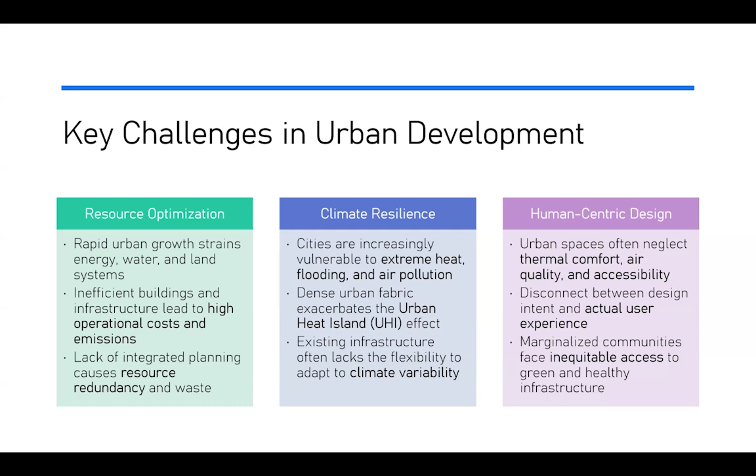So how can we use SusTech in addressing our urban development? These are a few key pointers highlighting what can be done for our sustainable smart cities using sustainable technologies. Smart cities integrate digital technology with sustainability goals to enhance the quality of urban life. The first role of SusTech in smart cities is data-driven urban design. Using simulations, sensors or digital twins, it makes evidence-based decisions across the planning and life cycle of the building.

Resource efficiency is the major point: development towards low carbon or resource optimization of systems can be helped by simulations or sustainable technologies. Climate adaptive infrastructure: as we just discussed, our existing buildings are not adaptive, so using SusTech we promote resilient design by simulating or responding to climate risks. Enhanced livability, that is, human-centric environments. Humans should be able to live comfortably indoors and outdoors, with good air quality, mobility and accessibility.

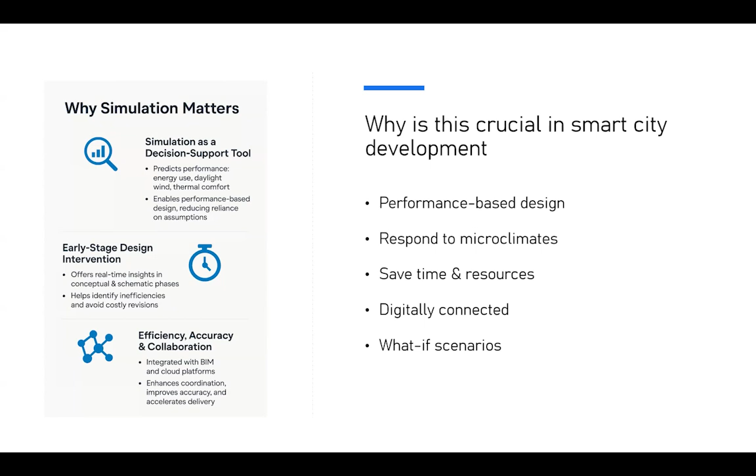Digitally connected: there is a lot of seamless integration technology available today, such as BIM, GIS or urban data sets, and all these can be integrated in our design development. And what-if scenarios is a key term we can use with simulations. We can predict, we can design, we can test the worst case and the best case, and compare the results of every design, however challenging or complicated. What if was always a question; now we have answers to it. Ultimately, simulation isn't just a luxury, but a necessity for building future-ready sustainable cities.

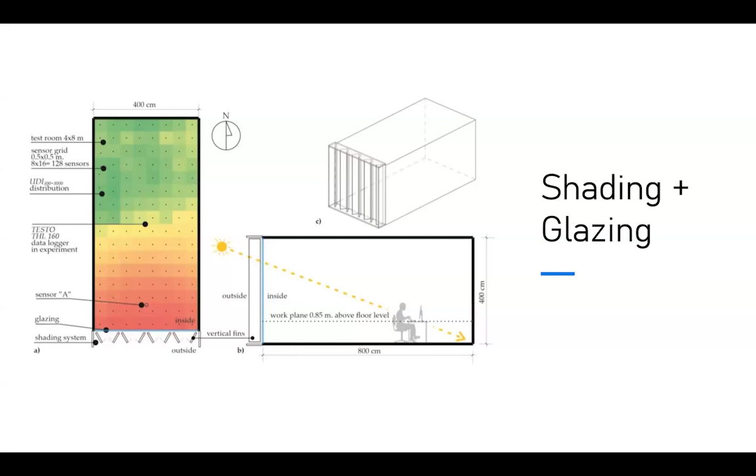Here are a few examples. Before talking more about the tools, I want you to look at what tools can do, then we can discuss the tools themselves. I'll start with the building context and then move to the urban context. So, shading plus glazing. This is an example of a room where daylight is entering the building, and the simulation tells us with a grid of sensors which areas are visually comfortable and which are not.

When designing for high performance buildings, shading and glazing are two critical elements that can determine our visual comfort and also the energy efficiency. So the rule of thumb of designing windows is no longer valid. With tools such as simulation software, we can predict what the right window sizing should be.

Using especially the solar diagram, the chart enables us to define what time the solar energy or the daylight is entering and what is the cutoff time we'll have to shade. So using the solar charts, we decide on the horizontal and the vertical or any form of shading devices. And there are a few standard terms that we compare our results with.

Here we have ASE, which is annual sunlight exposure, UDI, that is useful daylight illuminance, and DA is daylight autonomy. Basically, ASE tells us if there is too much direct sunlight in a space, which can cause glare or overheating. Whereas UDI helps us identify zones that receive optimal daylight without artificial lighting.

And the zones that are in gray tell us how much shading is required and how much openings are required. Therefore, it gives us the balance of both. And daylight autonomy shows how much of the year a space can function with natural light. So it is a simulation of 365 days.

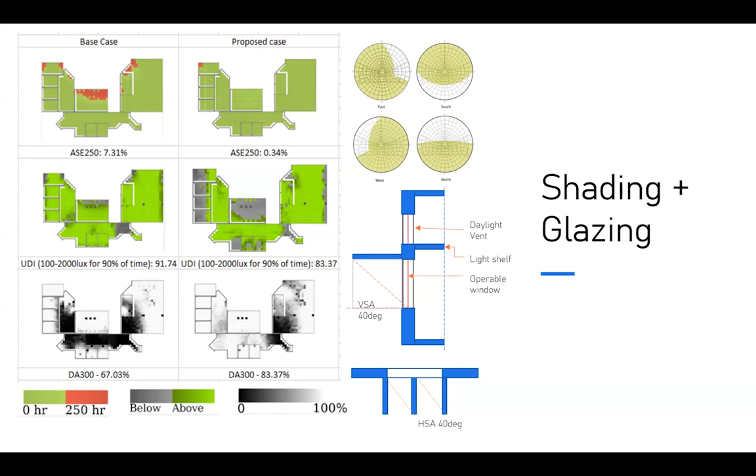So each simulation tells us differently when we are comfortable or when we are receiving enough light to do a particular task, and what percentage of the hours or what percentage of the days we are receiving daylight. So this is the daylight simulations. And moving on to the energy simulations,

it works a little differently. So there is some data gathering that is required even for the daylight. But when we move to the energy simulations, it becomes more complex because it's not just about the building geometry. We look at the lighting power density, equipment power density, that is the energy consumption by various sources,

and the fresh air integration, what type of HVAC system we have, what is its flow rate, what is the efficiency of the HVAC system, and the ideal temperature and humidity that we would want to achieve in our zones. And also sometimes it is very much required, especially for existing buildings, to interview and understand how the user is actually occupying the building.

So the simulation where we enter 9 to 5 for an office building is not always 9 to 5. We know people start early. We know people sometimes leave the office late, or there might be some activity which is out of the schedule. So therefore, it is important to understand these what-if scenarios and what percentage of the year this is happening.

And then we have our output saying what are the calculations, what is the consumption, what is the HVAC system that is best suited for that particular design, and schedules that are mismatched. So what happens due to that usage, what will be the energy difference? Therefore, this is for the new buildings, and for the existing buildings, there's another step of calibration.

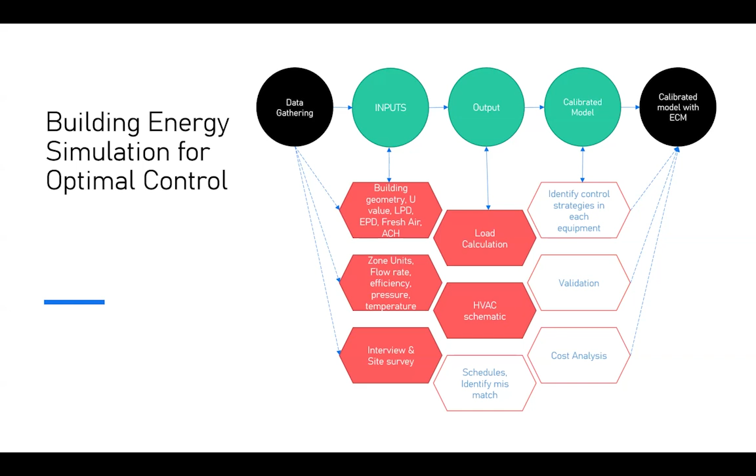This is one example of the actual existing system, chiller plant or HVAC system, that was in an office building, which is a newly built building of around 2 to 3 years. And we tried to simulate the same HVAC system in our software. So of course, the building geometry plays a role, but here the HVAC being the high energy consumption equipment, we had to match the exact details of the site with our software.

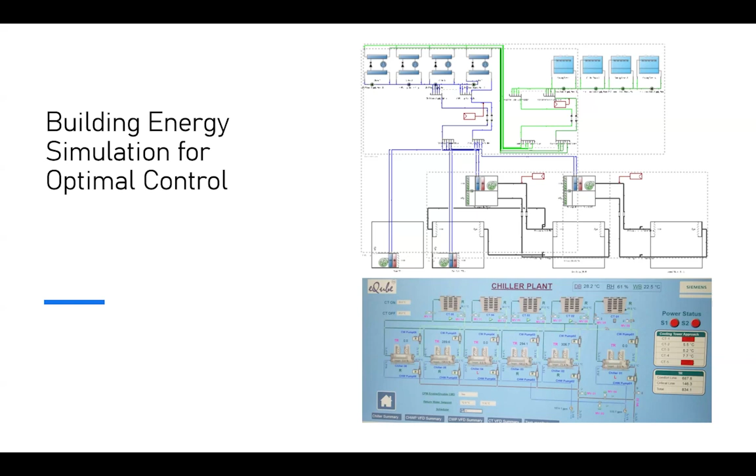So the number of chiller plants, their efficiency, their inlet temperatures, outlet temperatures, everything matters. And how many chillers are running at a time, and how many chillers are running during the peak consumption. Everything should be as per site. Once we get our model right, which has further steps to understand how to get our model right.

So this is one of our understandings of simulation, where the model usually gives us an auto-sized system, whereas in the actual scenario we set the limits for everything to match the site and our model. We go with iterations of inputting data. So when you input all the data at once, the software crashes and your data might not match the existing data.

Therefore, we went with iterations, such as first identifying the type of system, second entering their data with actual numbers, equipment by equipment. That is first the cooling towers, then chillers, and then the temperatures and the pumps and the variables and the set limits, etc., and so on.

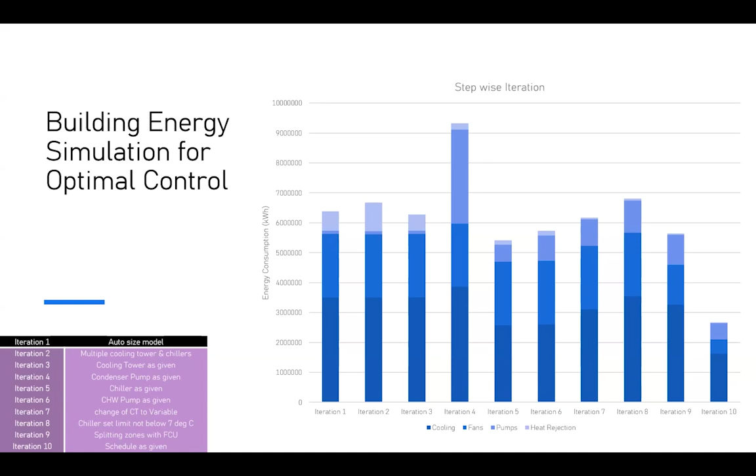So when we see a hike in energy consumption, we know something is wrong because we know what is the existing energy consumption. So we correct our simulation models to the existing, and the iterations are captured in terms of errors. The goal was to reduce the gap between the simulated energy use and actual utility.

Therefore, both monthly and annually, the data was checked, and the statistical indicators, that is the standard evaluation method for calibration, are CVRMSE and NMBE, that is the coefficient of variation of root mean square error, and the other one is normalized mean bias error. As per ASHRAE Guideline 14, it is acceptable to have CVRMSE below 15% and NMBE within plus or minus 5%.

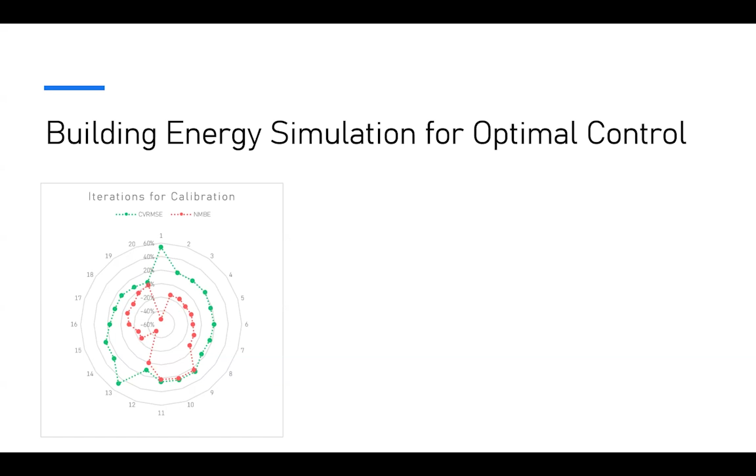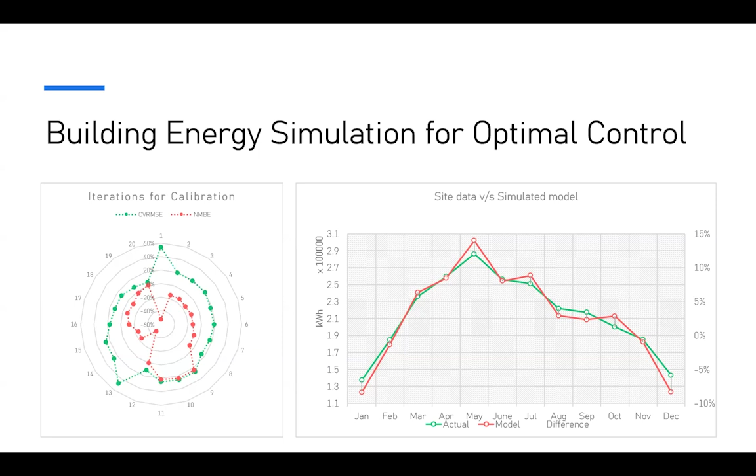So this is the data that we could achieve: the monthly energy consumption, the actual versus model. And now that we have our model ready with the limit that has been set for the error margin by ASHRAE, now we can tweak the energy conservation measures that can be implemented on site for the existing building. So all this is possible only with the help of simulation software. So this is with the building where we have seen the daylight and the energy.

And similarly for the urban context, we have different metrics. So it's not just about temperature and humidity. There are other variations which are not controlled by our HVAC system, that is our wind patterns or the radiation outdoors, where we are directly exposed to the sun. Therefore, UTCI is one of the key metrics, which is the Universal Thermal Climate Index, which gives us a broad temperature difference. And UTCI tells us how it feels to people in outdoor spaces. It considers all the parameters that have been listed, and it makes a comprehensive thermal comfort index.

And it is a scale of -50 to +50. -50 refers to extreme cold stress, whereas +50 refers to extreme heat stress. The ideal temperatures are between 10 to 25. And this is usually used in the urban context because of the urban heat island effect, which is also referred to as UHI.

What is this urban heat island effect? Urban areas tend to be warmer than surrounding rural regions, especially at night. This is due to the heat-retaining nature of built surfaces like our concrete walls and so on. They lack vegetation, which results in higher energy demand, increased discomfort and heat stress, and poorer air quality. Therefore, it is important for us to understand the patterns in the urban context in terms of all these external parameters, and the scale that we have is UTCI.

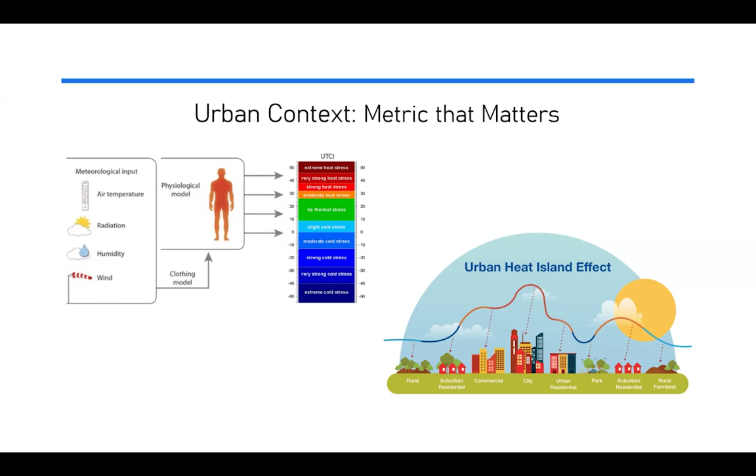And here are a few examples of UTCI simulation. UTCI tells us the temperature, and it varies over the times in a day. So we have simulations here showing morning, midday, afternoon, and night. So why are we looking at temperatures at different times in a day?

For example, suppose morning, which is 7 to 11 hours. This is where people begin commuting or engaging in light activities. So pathways need some solar exposure in cold climates, and partial shading might be required in warm climates. The morning temperature should ideally be 15 to 23 degrees Celsius. I'm not referring to air temperature, but the UTCI temperature, which is considered to be good. And if it's not in this range, then we have design interventions.

Similarly, for midday, that is 11 to 13 hours, UTCI can rise very drastically. It can go as high as 38 degrees Celsius, especially in dense and unshaded areas. This period poses peak heat stress, especially in tropical and arid climates. Therefore, the design interventions for this time can be dense shading using trees, canopies, or reflective materials, that is light-colored pavements or roofs, and then vegetation. This will minimize the heat traps within the urban context.

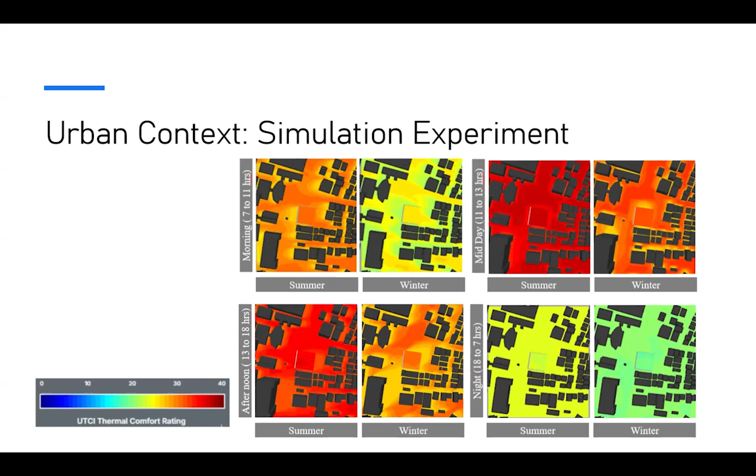Therefore, the design intent during this time can be looked at in worst case scenarios to use permeable surfaces and vegetation to reduce retained heat, and design for nighttime ventilation, for example, chimney effect between buildings, and avoiding any dark surfaces that may radiate heat even post sunset.

Similarly, for the same urban context, we have solar exposure measure. This is another, not metric, but a different layer of usage patterns that we can see in the urban context. This simulation calculates how much direct sunlight a surface or space receives throughout the day or year. It is measured as percentage of sunlight time or hours per day that it faces.

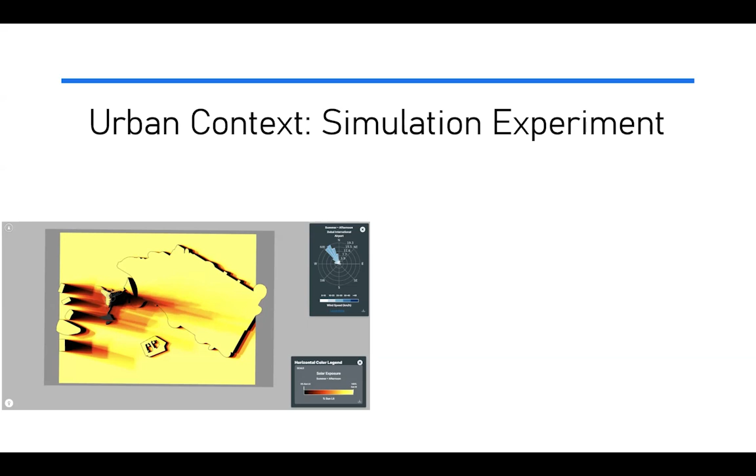If there is too much exposure, it leads to overheating and glare. If it is too little exposure, it means there is poor daylight. Therefore, the challenge here is to have daylight and shading at a right point.

And similarly, we have wind comfort simulations. So the wind simulations often use CFD, that is computational fluid dynamics. It tells us how wind flows through urban spaces. So here the map is showing passive, active, and uncomfortable winds. Passive means it is suitable for walking, sitting, or active use, and uncomfortable means windy zones that deter people or cause hazards.

Therefore, our space can be designed accordingly based on the outdoor spaces that are required. It need not be just ground always, it can also be the terraces. Therefore, here the terrace space of the buildings was also included in the simulations.

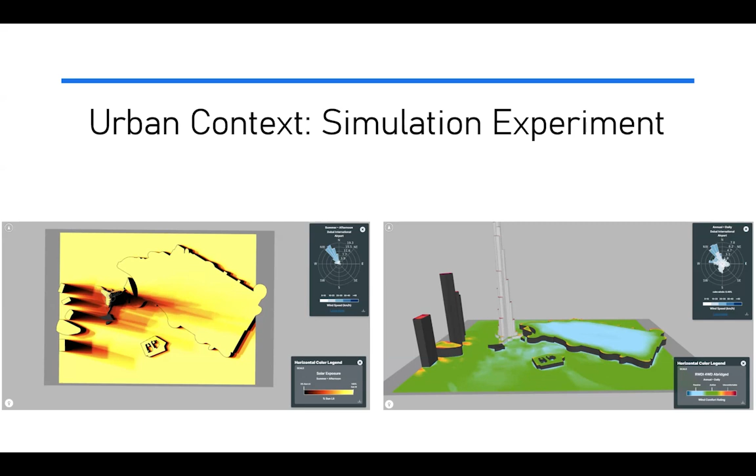And the last one that we have in urban context is the wind patterns. Previously, the wind that we have seen is whether comfortable or not comfortable, but this slide shows the direction. So why does this direction matter? Simulations will often visualize wind data in the form of wind roses. Here it is showing the predominant directions, and there will usually be seasonal patterns as well. The speed range here shows a scale of low, medium, and high.

Low is where it may cause stale air, discomfort in warm climates, and poor pollutant dispersion. Medium means it's generally comfortable and it can support natural ventilation and thermal relief. The high wind may cause discomfort and may lead to wind tunnels and unsafe outdoor conditions.

Therefore, it can help us in determining the design interventions. Low wind areas may be designed to enhance ventilation strategies by giving porosity in the building, or courtyards, or wind catchers. Medium winds can be harnessed for passive cooling; it is a great comfort outdoor area and can be used as is. High wind zones can call for wind breaks, therefore vegetation buffers, or podium level analysis for the pedestrians, and the design interventions can be given accordingly.

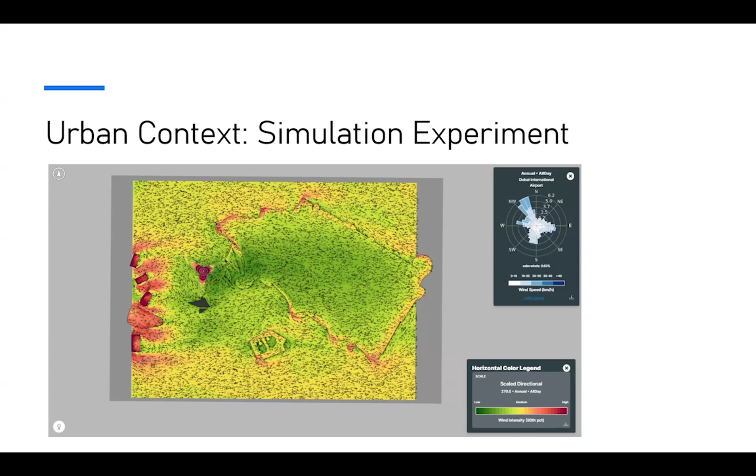Now, once the design interventions are done, there is before and after analysis for every design. There is another tool which can do it very quickly. This is ENVI-met. ENVI-met is a software simulation tool which understands how microclimate responds to different urban design strategies. This tool provides one key output, that is absolute difference in potential air temperatures. This metric shows how the air temperature at pedestrian level can be lowered in some cases.

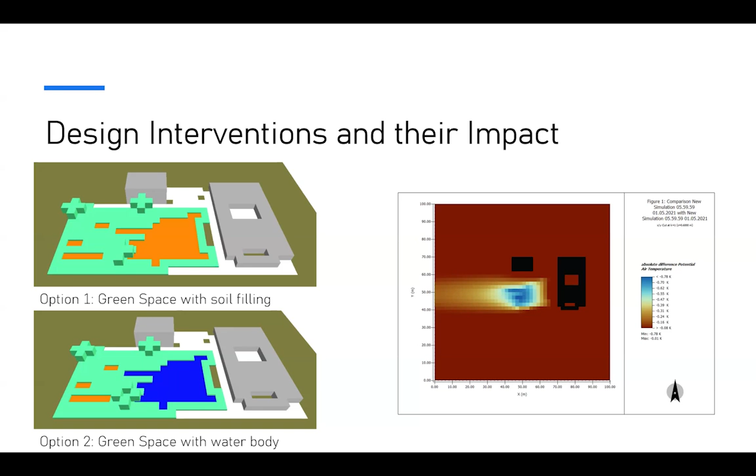But if there is a positive value, it implies that the design might have trapped heat or disrupted the airflow. Therefore, it is a bad intervention. So for quick decision making we have different tools, and for detailed analysis we have different tools. So when should you use what?

So these tools have evolved, and at different stages of design, it helps in different ways. For example, at the concept stage, simulation helps us understand how massing, orientation, or building form will interact with climate, giving us big picture decisions right from the beginning.

Moving into schematic design, the simulations set some quantifiable sustainable goals, such as energy targets, daylight availability, or thermal comfort benchmarks. So in this stage, it's more about what we may achieve.

But when we go into the design development phase, here the tools become more precise. We can test different materials and refine the HVAC system configurations, and the facade options for the building will be frozen. We can also ensure compliance with green building certifications.

Even at the tender and execution stages, the simulation adds value. These allow us to validate design choices and justify return on investment data. In some advanced cases, simulation can also extend to post occupancy, where we can monitor building performance in real time and track the data back into the future.

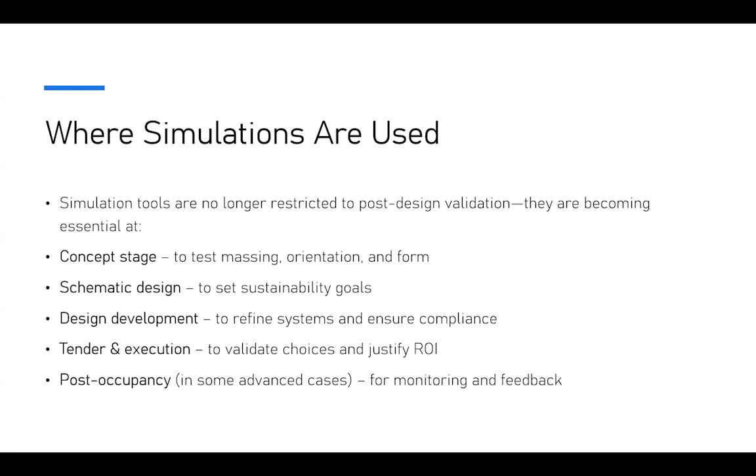The software I have used for energy simulation is Design Builder, which is based on Energy Plus. The daylight simulations are usually done in Rhino with Grasshopper. SimScale is one of the best tools for energy simulations or even CFD simulations, but it's not open source.

And with ENVI-met, we have seen how it can simulate microclimate and also show us the temperature differences for each design intervention.

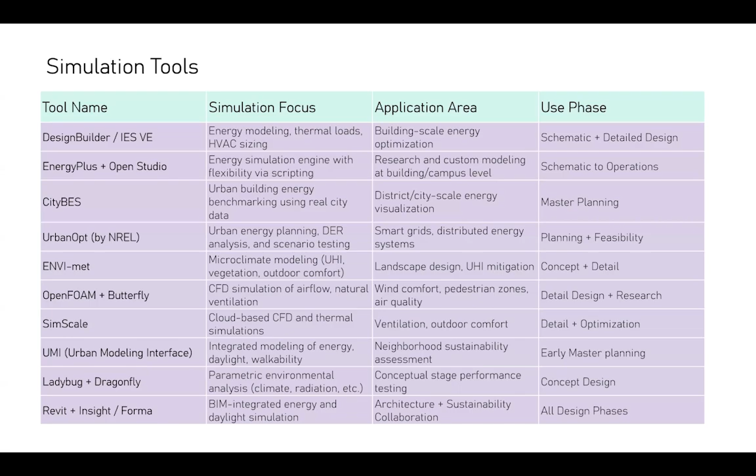Now we have the tools. Okay, how can it be integrated? There are many tools, and each tool works in its own way, giving us different predictions. But it is always key to understand - it is very smart to design sustainable smart buildings with smart platforms.

For example, BIM platforms serve as a single source for geometry and documentation, which can be collaborated with simulation plugins. Therefore, it can allow real-time energy and daylight simulations and also thermal comfort assessments directly within the BIM software.

And cloud collaboration, that is BIM 360 or ACC, Autodesk Construction Cloud, enables designers to collaborate in real time, reducing delays. This can also be collaborated with analysis tools, so the high accuracy simulation tools can export data in real time without wasting time on modeling.

Without the software, without the simulation help, the challenges would remain as is - buildings might have higher operational energy use, over-dependence on artificial light, poor thermal comfort or ventilation, and oversights in urban climate, because microclimate is not usually taken into consideration when designing a building in a city. It's used at a large scale of that country or city's data, but microclimate makes a big difference in design interventions.

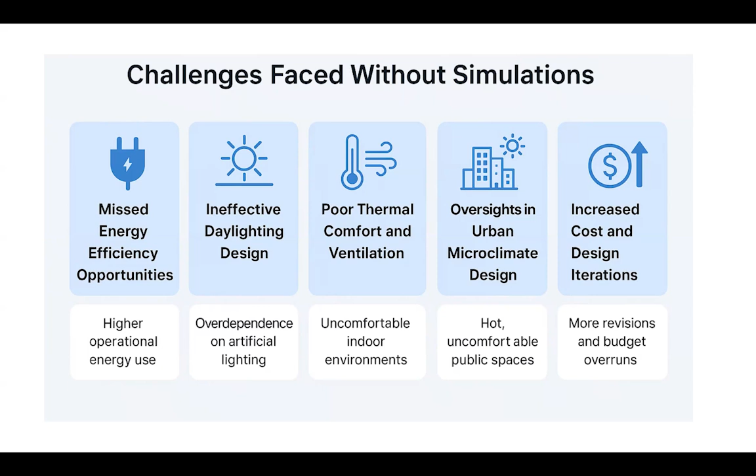That's it. And the road forward for this simulation-based learning is the digital twins of cities, where we can do real-time simulations of every minute. Data can be interpolated every hour to decrease the burden of heavy data, and the energy use patterns can be extracted.

Any mismatch in energy use between the real building and the real-time simulation can help us identify errors very easily at that given point in time, without waiting for months to analyze where and what is actually wrong.

And community-driven simulations - it's not just the designers, we engage the actual users, that is the citizens, and we ensure they get actual comfort in the cities they're living in. This can be tracked by taking real-time feedback from the citizens and also interpolating it with sustainability metrics.

And scalable learning platforms - simulation based through web tools that are immersive. This is more advanced, where we can open to VR or AR, virtual reality or augmented reality, and gamified learning for young professionals.